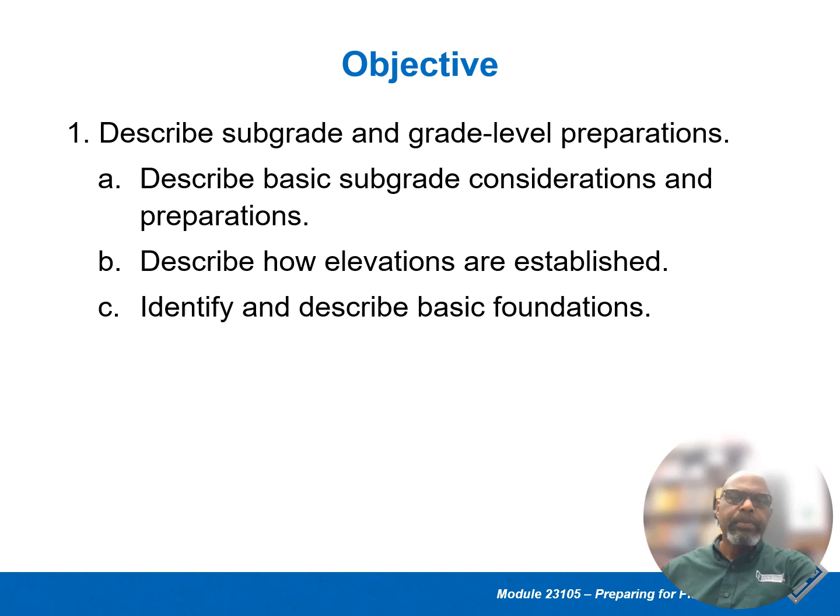First, we're going to be looking at the subgrade and grade level preparation, getting it ready before the concrete is poured. The objective of this section: you should be able to describe subgrade and grade level preparation, describe the basic subgrade considerations and preparations, describe how elevations are established, and identify and describe basic foundations.

There will be a performance test, and we're going to look at different things we can use to operate a vibrating compactor. We don't have one here, but I will have some videos you can take a look at to see how it operates and the purpose of using a vibrating compactor and what the compactor is for. We should also check and confirm the elevation of a prepared subgrade.

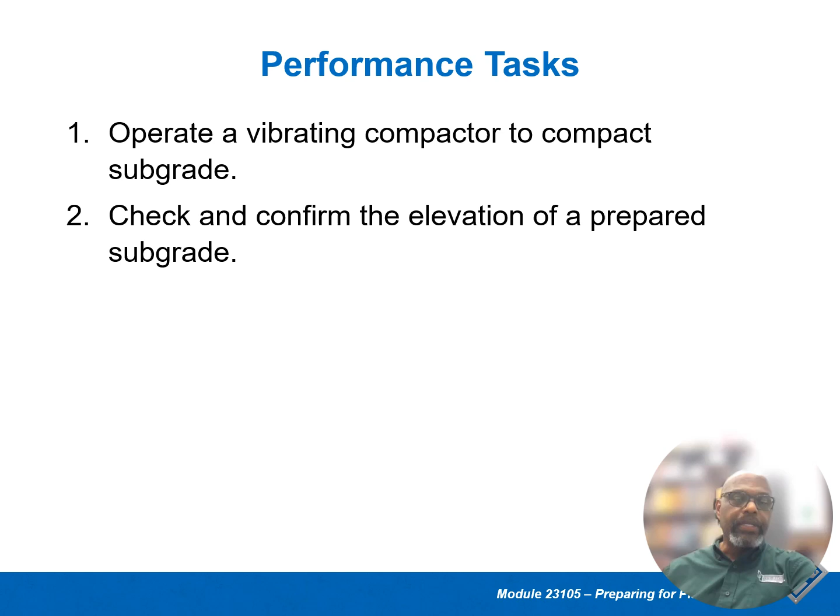Those are things that we can do. Again, when it comes to construction, safety comes first. So we need to know the company's safety policies and procedures. If you're working for a legitimate company, they will have policies and procedures that must be adhered to.

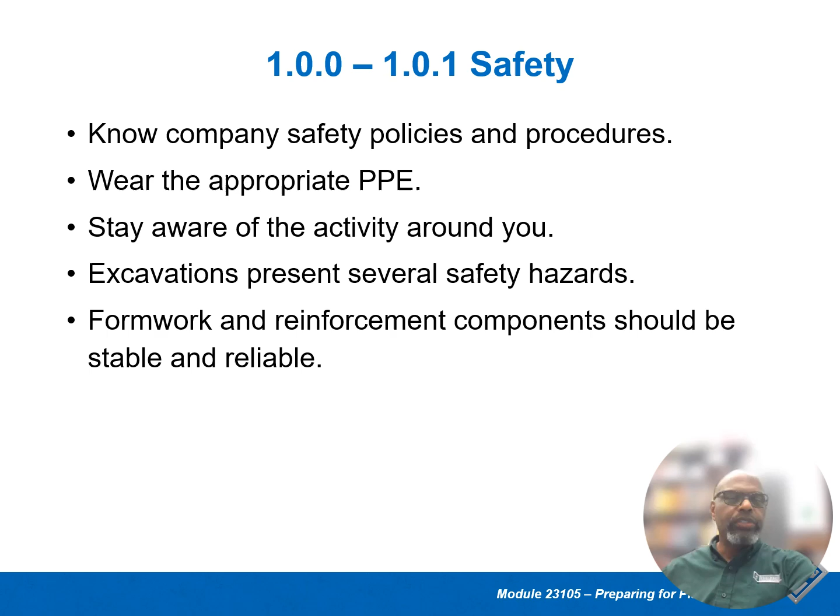We need to wear the proper PPE. We need to stay aware of activity around us. Excavations, which is digging holes in the ground, moving soil, moving the grade from one place to another, clearing it out - excavations presents several safety hazards, and formwork and reinforcement components should be stable and reliable.

Subgrade preparation: a well-prepared subgrade provides uniform support to the structure above it. So the most important thing to keep in mind is that when we're using concrete as a building material, what's below it is just as important as the concrete.

Poorly prepared subgrade can lead to differential settlement. In other words, some places might be higher, you might get cracks, or you may get concrete dropping to a lower position if it's not done correctly.

Let me give you an example real quick. I bought a new house, and each year the apron as you go into the garage dropped probably a half inch, until it was close to 6 to 8 inches. So to go into the garage, you had to slow down and really push the vehicle up that ramp to get in.

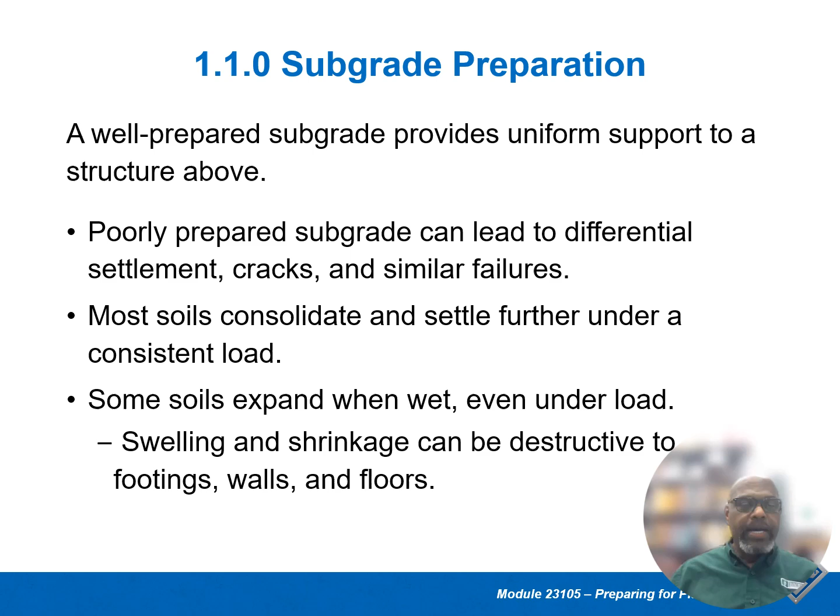Some soils expand when wet, even under loads. Swelling and shrinkage can be destructive to the footing, walls, and floors - and whole buildings. If you look at a brick house and see stair-step cracks in the mortar in the bricks or blocks, it's probably because the foundation has settled and cracked or been damaged, and that is a major problem.

Proper subgrade conditions or considerations: construction sites are surveyed, mapped out, and planned. And the soil must be tested.

It is tested for many different things, from contaminants, for number one, but also what type of soil it is - if it's sand, or clay, or a combination of both, if it's topsoil, whatever it is - it needs to be tested to find out how you're going to prepare it.

When taking soil samples, they would make some type of grid to take certain samples, like every 3 feet or every 5 feet, whatever the distance is, and then take them in different locations to traverse that area, going across different levels to make sure what's in the ground is known. So reference points, benchmarks, and elevations are established by a survey crew.

Excavation or concrete crews may be expected to do the work and lay out the things on that site. And so they need to know what's there so they can prepare it correctly.

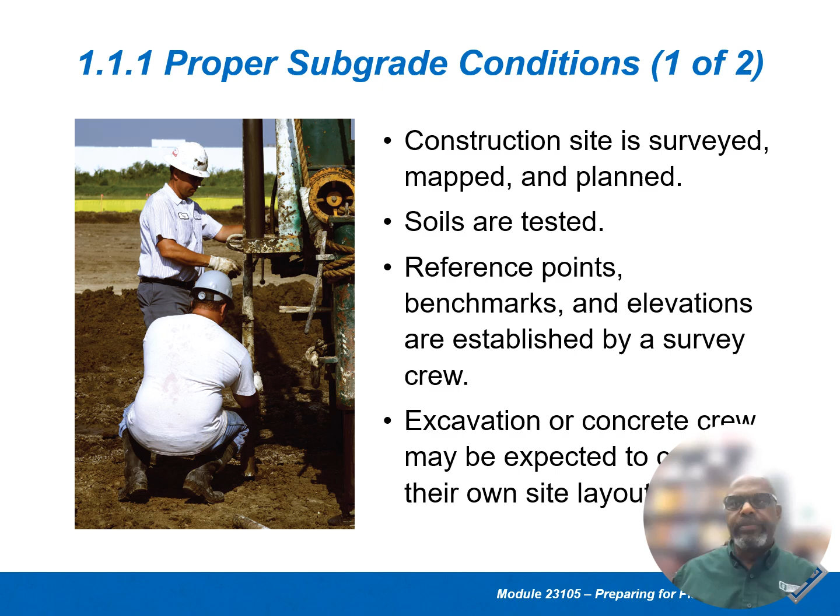And I'm going to tell you, it will shrink, it will cave in. I've seen a spot of land once, and it was always a divot there, a hole, and it was holding water all the time. And no matter what you did, it was always there, always. So it took years of filling it in to be able to build it up and to compact it to get it to be stable.

So soft spots will not support a slab. Hard spots, such as a buried boulder, can move upward and damage a slab too. The ground around it might be soft, but a boulder is hard, and it can cause some shifting and uneven stress on the concrete.

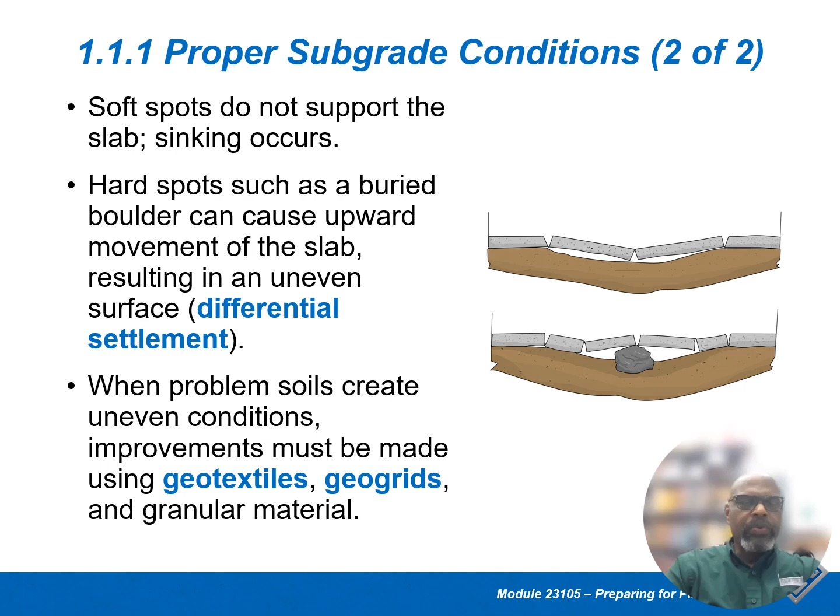So when problem soils create uneven conditions, improvements must be made using geotextiles or geogrids and granular type material as a base.

Compacting is the consolidation of soil by tamping it, rolling it, vibrating, and or the application of weight. In other words, using something to take that soft soil or sand and really compacting it down so it becomes a solid structure to be able to build on top of.

So many times you see large construction sites, especially building warehouses and things. When the excavators come in, a lot of times they're taking some soil out to bring other soil in, because they know what it is, to be able to compact it, and they will spread it out a certain depth, and then they go over and over again just to vibrate and to roll it.

And I'm going to show you some of the equipment. I think the next one would be something you see on very large job sites when they're building warehouses. But the purpose of it is to have a good base. Without a good base, it won't hold up.

It increases the stability of the soil by eliminating voids. It can reveal problems that need to be addressed when you're compacting. You're compacting, and next thing you come back and see it's unlevel again. That's just telling you something. You need more compacting, more of a base added to it to correct those problems.

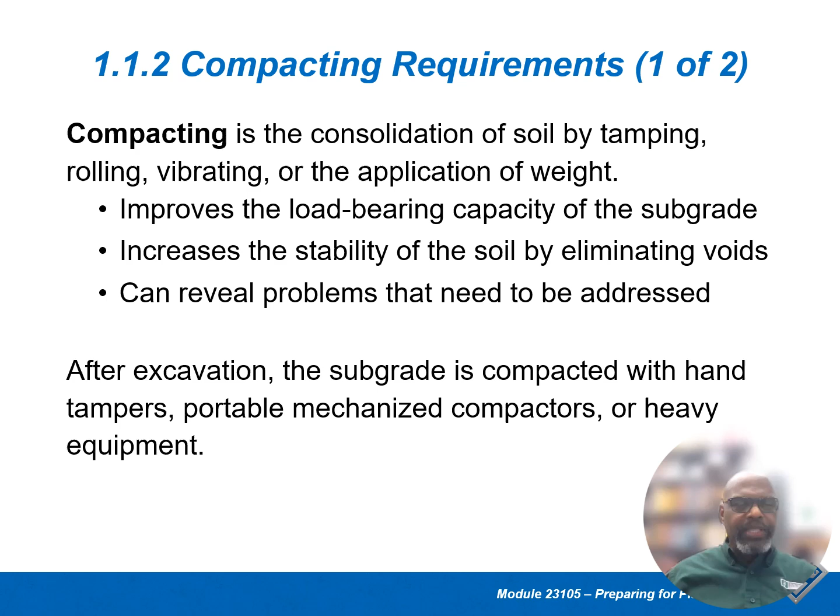The hand tamper is just a flat thing. You got some weight to it with a stick on it. You just do it by hand by tamping it down. But they have a mechanized compactor that sits back and it pats back and forth to pat down the soil. But again, not just using soil, a lot of times they would put down a base, using some type of granule like crushed rocks that are crushed pretty fine, to be able to compact that and give it a solid base.

Here's a granule material that is used. It's like crushed rocks, and it could be sand too. This machinery, basically what you see there, will vibrate and roll those little granules, putting an indentation into the ground, but it's compacting it as it rolls over. It's putting that weight in those defined areas.

So sand and gravel are not cohesive and need vibrating compaction equipment to be able to compact them. And to help it compact, because sand shifts really easy, if you add water to it, it becomes more able to compact, so that you can join it together.

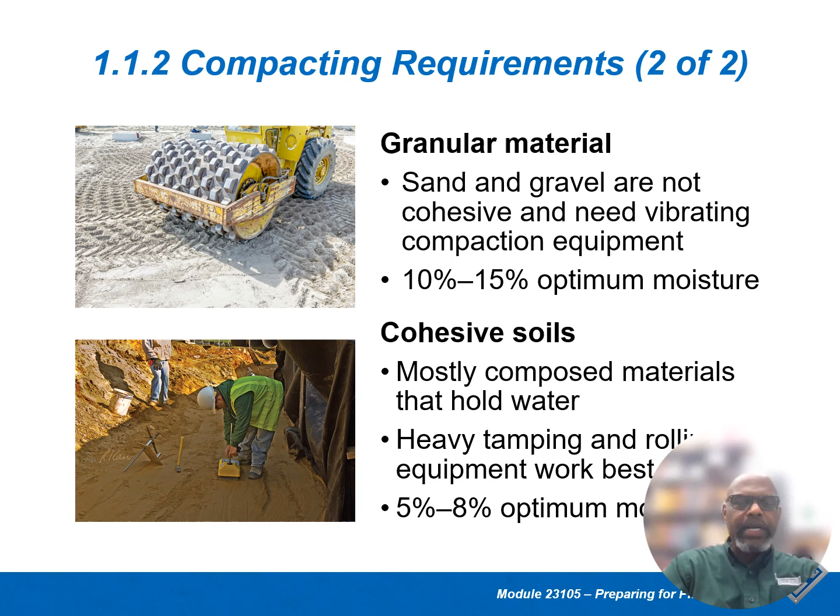Cohesive soils are mostly composed of materials that hold water, such as clay. Clay is a material that sticks together really tight. Heavy tamping and rolling equipment works best, and the optimum water content would be between 5 and 8%.

Groundwater, if you've got a high water table, can affect how things cure and shift. Many times, groundwater close to the surface can hinder subgrade and foundation preparation. So drainage tiles may be specified and installed outside of the foundation wall, adjacent to the base, to drain the water away and keep it from having issues.

If you look at this diagram, you can see the tiles have crushed stone around them for drainage, but also to keep the drain tile from getting clogged up. So you're using something that can filter out things that would plug up the pores, while still allowing the water to be filtered through.

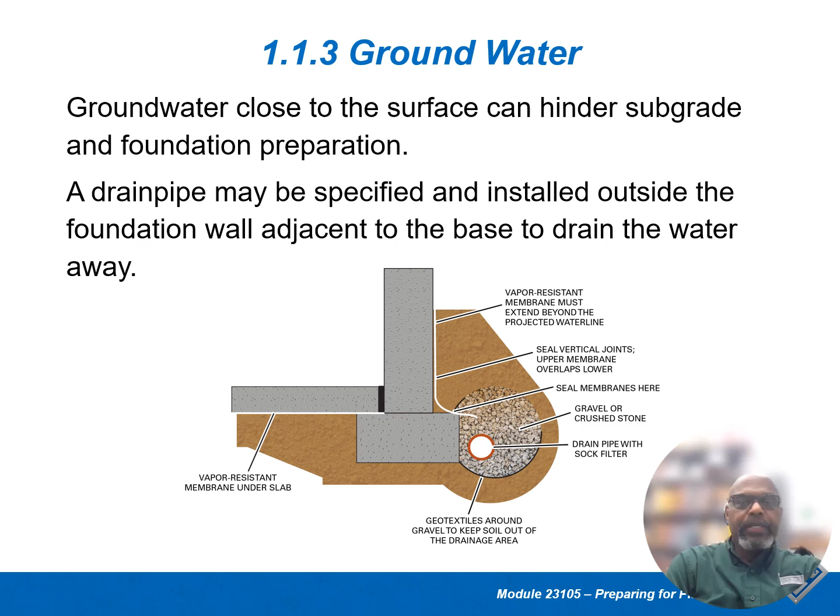Using vapor barriers, which is basically some type of plastic membrane, keeps moisture from coming into the floor or the concrete. That's a really good diagram of how to use drain tiles to remove water from the structure. Drain pipes may also be specified for the job, but the main thing is to keep water away from the foundation.

Flowable fill, or controlled low strength material, refers to the flowability of the fill. It's used in utility cuts, trenches, and similar applications as a backfill or a subbase. A mixture of fly ash, water, and cement can be used, and it does not require compaction. It has very low compressive strength.

But it's self-leveling because it's so wet - water poured in always seeks the same level - and this is used to give it strength.

Basically, we could call it a slurry mix. It's used in utility cuts - in other words, many times when burying things underground like utility lines, they just pour this slurry mix into the trenches to keep from damaging the pipes when things shift.

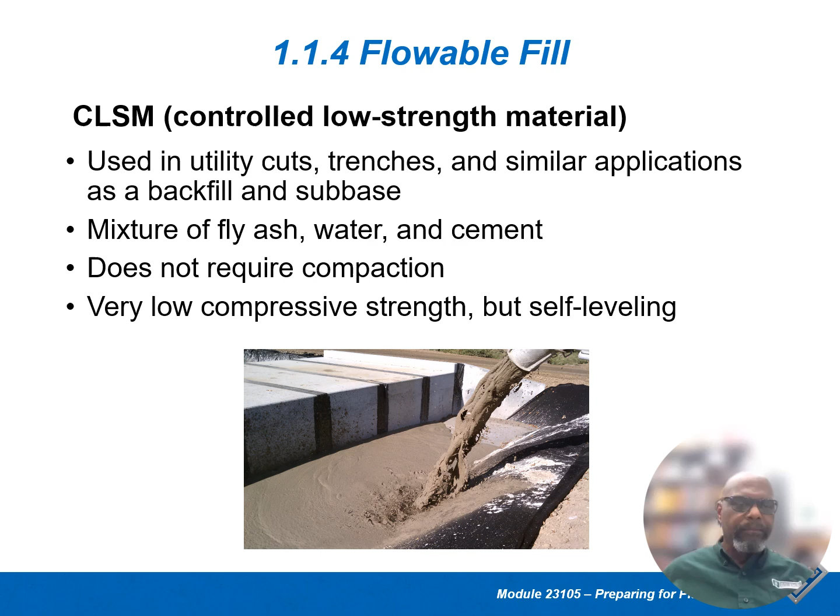Establishing elevation: there are several ways to establish dimensions and elevation. Elevation is the height of something. You could use a builder's auto level, a laser level, a hand level, or a string with a string level on it.

These are different types. A builder's auto level is where you look through to sight things out. A laser level just shoots a laser that you can use with a measure to get the height you're looking for. I'm going to see if I can put a video that you can watch to see how to set levels.

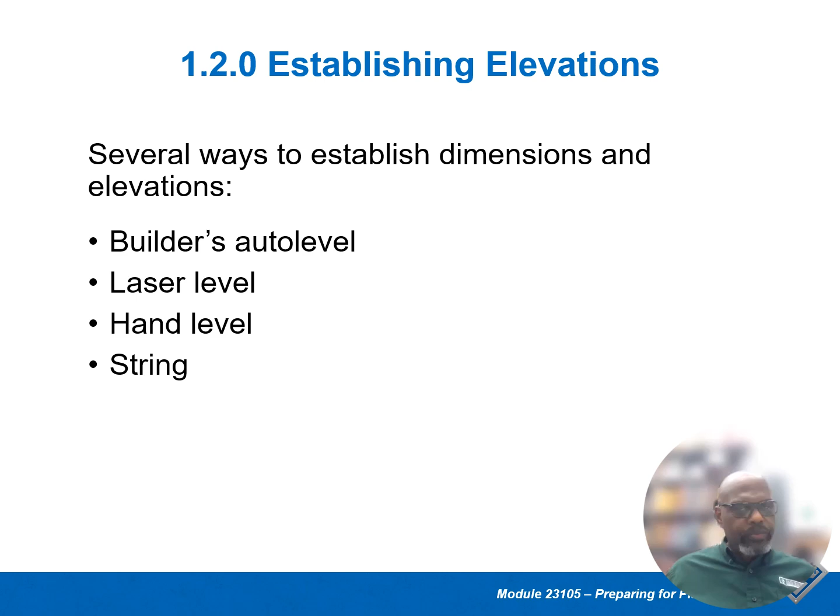This is a builder's auto level, used for sighting things so we can take measurements and determine elevation. What you have is a measuring stick, and where that level hits is where you know how low something is. You can take multiple readings.

I used to set these up and use them when pouring concrete or putting in base material, to make sure everything is level. If you're using some type of fill to level it out, you want to make sure that when you pour concrete over it, it is level.

A builder's auto level sights through the scope to the benchmark. A benchmark is a measurement that you're starting with, what you know - a measurement you want everything to match. So find your benchmark and determine its elevation.

You rotate the scope and sight on the leveling rod, holding it vertically at the unknown point. The difference between the two readings establishes the elevation of the second point, wherever you're looking at.

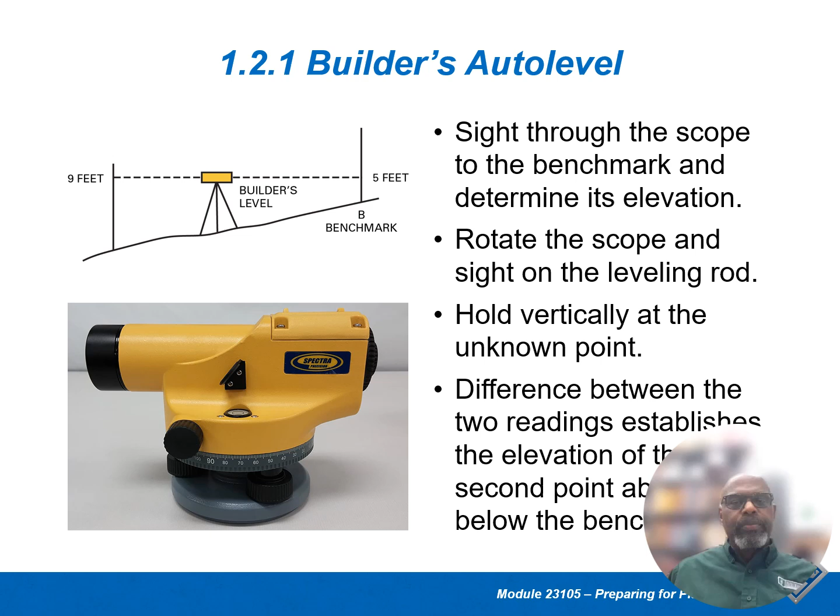I'm going to show a video so you can understand how to set this up and how to use it, and we will show you one in the classroom, how to use this builder's auto level.

A laser level - you can see this shoots a laser. It sets the base of the leveling rod on the benchmark. Turn the receiver unit until it faces the transmitter - there are two different components you're using.

You're shooting a transmitter, which sends a signal out. The receiver hits that signal, and you can know where the level was at by using it to find the mark. The laser shoots out a beam, and you use a receiver to receive it to know what your measurements are.

Slide the receiver up and down until it intercepts the laser beam. The receiver box will give a steady tone and show a bar when it hits the target.

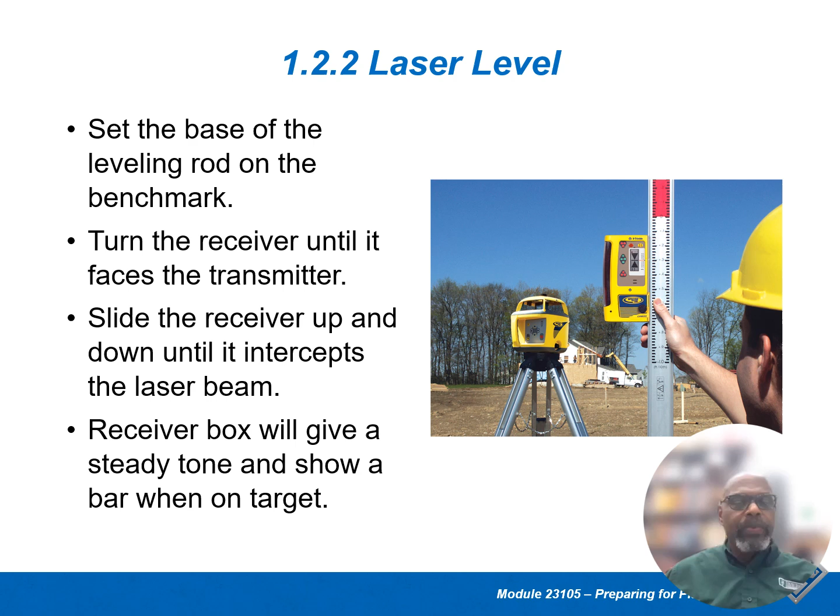Batter boards in construction, especially in surveying, when you're laying out the building and especially the corners, and you want to know exactly where you set things at, you will build out a batter board, or you have some already made, but you would set these batter boards to find the corner, the starting point.

Batter boards are wooden stakes and horizontal boards erected 3 to 4 feet outside the edge of the slab, outside of the slab, and we are setting some strings to be able to do it. We'll see this in another slide, but understanding what it's used for.

We use a nylon string, stretched tightly, taut, between the batter boards. The forms are placed using the string lines as a guide.

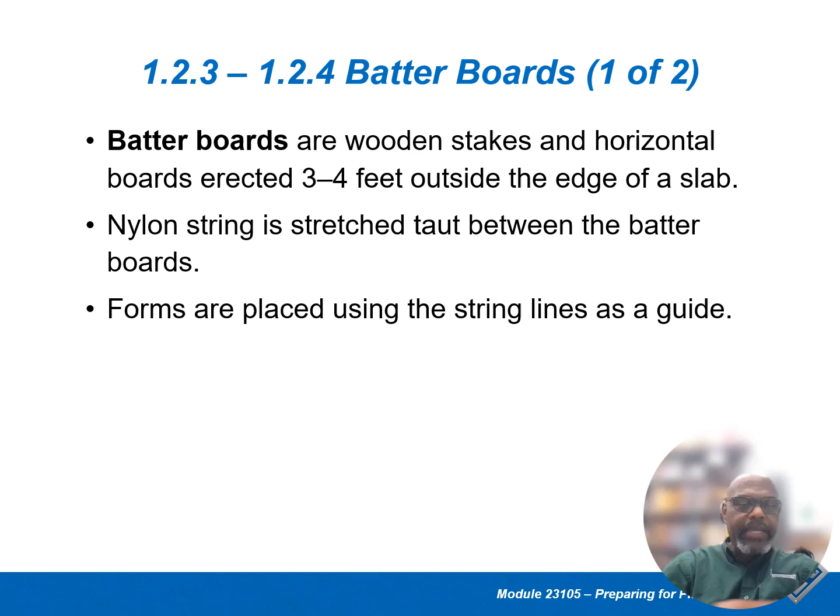You can see these batter boards at every corner. From that batter board, it's stretched out 4 feet from it, so we have room to get around, because we set in a string to find out exactly the layout. If we need to trench out a garage for the floors, or set our foundation or walls, we use these batter boards to run a string, set it very tight, and find exactly the layout of the structure.

So when the slab dimensions are wider than the screed, the intermediate elevation points must be established inside the slab. Use a level to transfer the elevations - in other words, use a string level that you can move up and down till you get exactly level, so everything is at the right point.

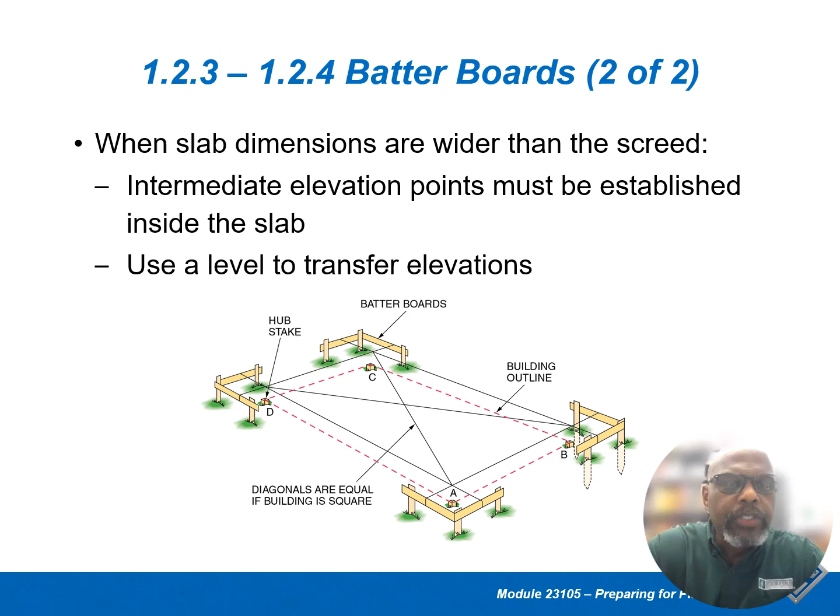One of the most important things about using batter boards and lining things up is to make sure it is square, that the corners are square. A way they can check it is by checking the diagonals from corner to corner, diagonally from one end to the other. If it's square, they will equal the same distance.

Foundations: the chosen foundation depends on the structure and the load imposed on the soil. A deep foundation includes piles and caissons, used for heavy loads such as tall buildings with basements and structures on poor soils. Shallow bearing foundations, such as those under walls and columns, are used for large structures constructed on good, supportive, stable soils. Foundation depth is less than or equal to its width.

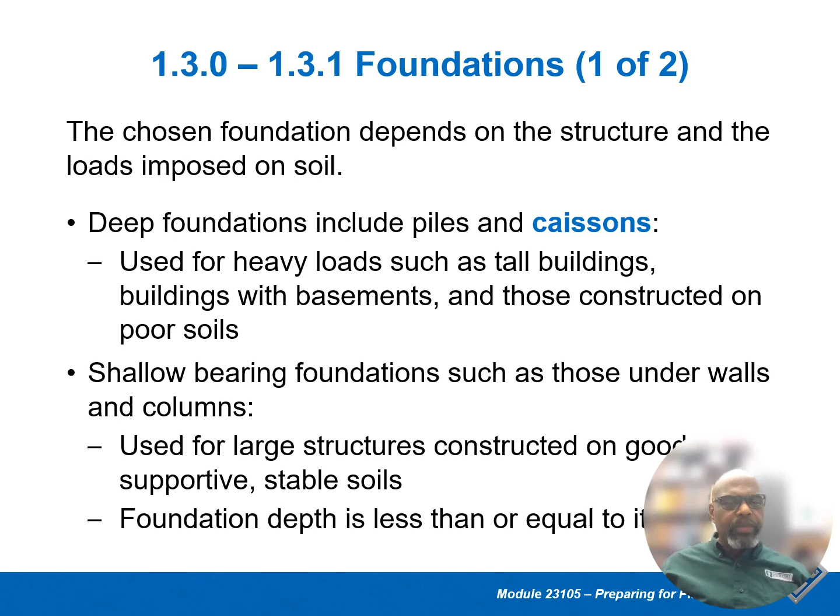In other words, the foundation is always large, to support and span the weight of the walls in the building over a large area, dissipating some of that weight over a larger space. So per square foot, the weight will be a lot less.

These are certain types of foundations. A foundation will always have a footing - if you look at these, they pour this first. This is a pad that is poured, and it's always wider than the walls it's supporting, because it's dissipating the weight over a larger area. Again, looking at just a cutaway, the footing would certainly be designed to go over a larger space.

I'm going to try to draw something to show you what the footing looks like - this is the footing going across the building, and this is the corner, and of course it goes up vertically. And so again, if this is the wall, this footing would be poured first, and then they would pour the wall on top of it once it cures.

These pieces here are rebar, reinforcing and giving more tensile strength to that concrete supporting those walls. We know concrete has good compression strength but very poor tensile strength. With the weight of the walls of the building on top, they add rebar to it - maybe even the walls will have rebar too, because the pressure against the grade may be there. Let me erase this and go to the next slide.

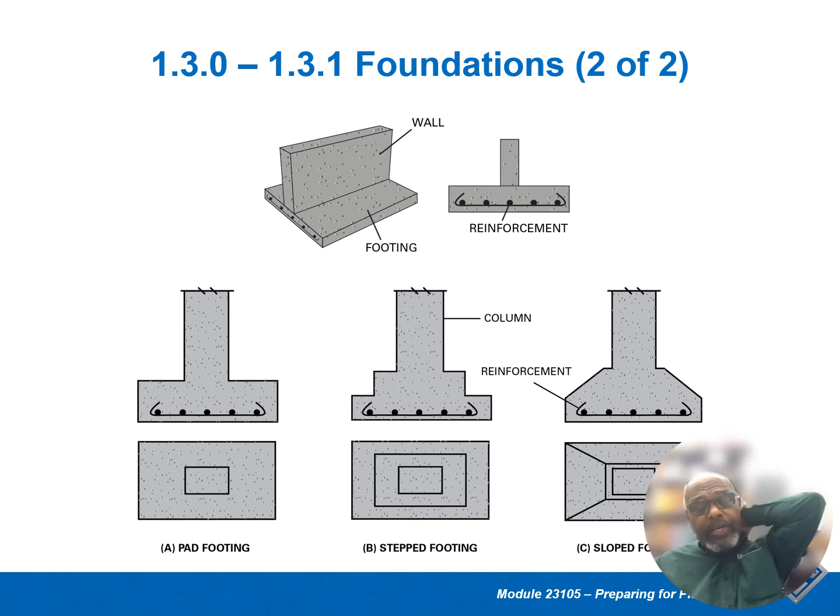These are different types of footings in these diagrams. So you can see that the footing's there for a reason. It is the main support. It's supporting everything.

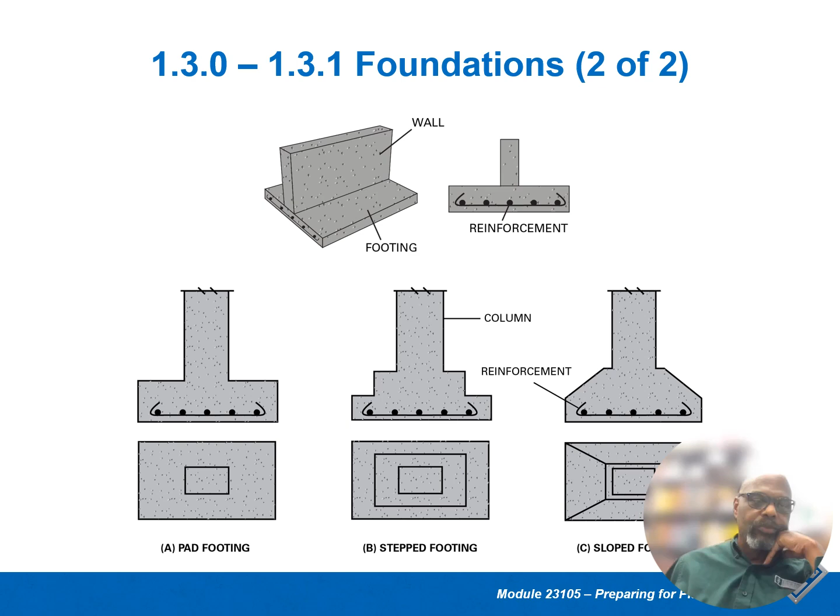So constructing foundations: most concrete foundations do not require finishing. They just pour it and that's it. You don't need to float it out, you don't need to screed it, you don't need to do all these things. It's just put there. And many do not require a form, depending on the type of foundation.

Sometimes they could trench it out and just pour it right into the trench, and that becomes the foundation. So because it's buried in the ground, the appearance is unimportant.

4 primary considerations: soil load bearing capacity should be tested. Reinforcement must be placed per the specifications. Concrete must meet the specific and specified strength, and footings should be sized and positioned according to the plan.

to provide intended support. Again, never make any changes. If you're building something, whether it's a house or a building, whatever the architect says to build it, that way.

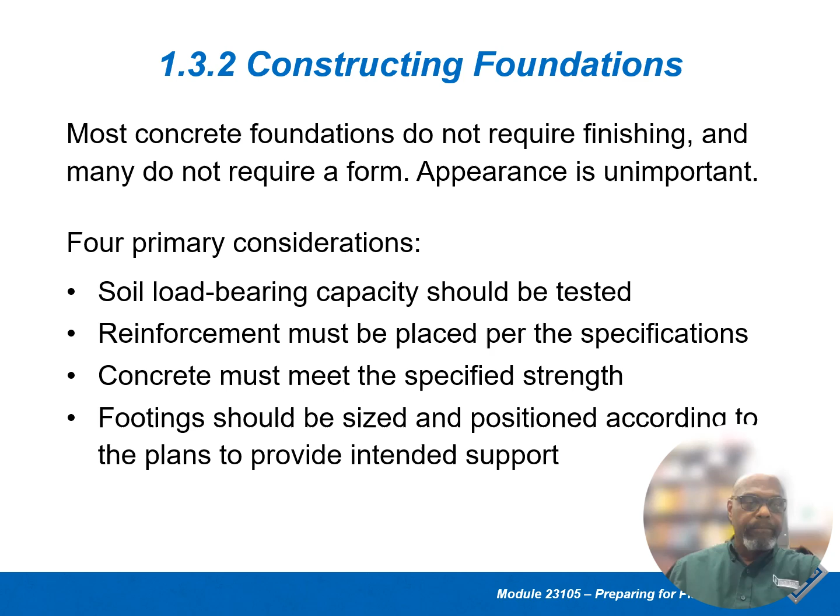So here's some terms we're going to go through for this first section. Angle of repose: that is the sharpest angle relative to the horizontal plane at which the sloping surface of the soil, such as the walls of a trench, it remains stable. The maximum amount of slope that a given soil can maintain before it begins to slide or to cave in.

Now that is really important because if you're trenching out certain things, you don't want it to cave in, and that can be very dangerous. And so they would have to shore up those walls so it doesn't cave in.

Batter boards is a temporary framing member that helps define structure corners and are set at a precise elevation upon which nearby elevations are based.

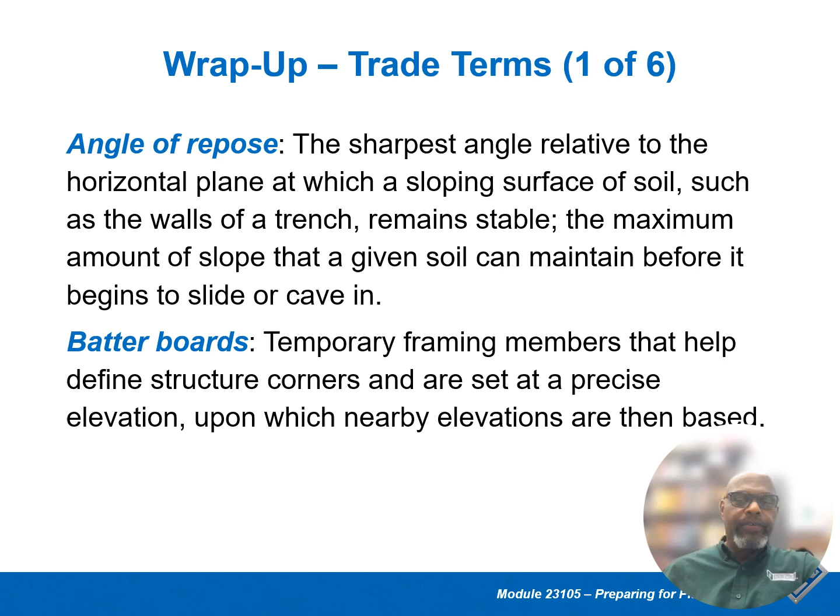So in other words, if you pour in, let's say, a garage floor, you want that garage floor level. You don't want one side higher than the other side. So we would set this using batter boards to set the level of that grade and also of the floor.

Benching is a method of preventing trench cave-ins by excavating the sides of an excavation to form one or more horizontal levels like steps, usually with vertical or near vertical surfaces between each level.

So again, benching is digging out the area so it's not like a vertical wall that can fall in. Benching is almost like an upside down pyramid. In other words, the farther out you go, the wider it becomes.

Benchmarks is specific points of reference, typically considered permanent, that marks an elevation. So a benchmark sets the main level, or it sets what we use for determining what everything else is going to be built to.

Caissons is watertight structures or chambers used for constructing work below water or as a foundation element. So caissons, in other words, trying to use these as a chamber that can be used. Matter of fact, I'll give you an example.

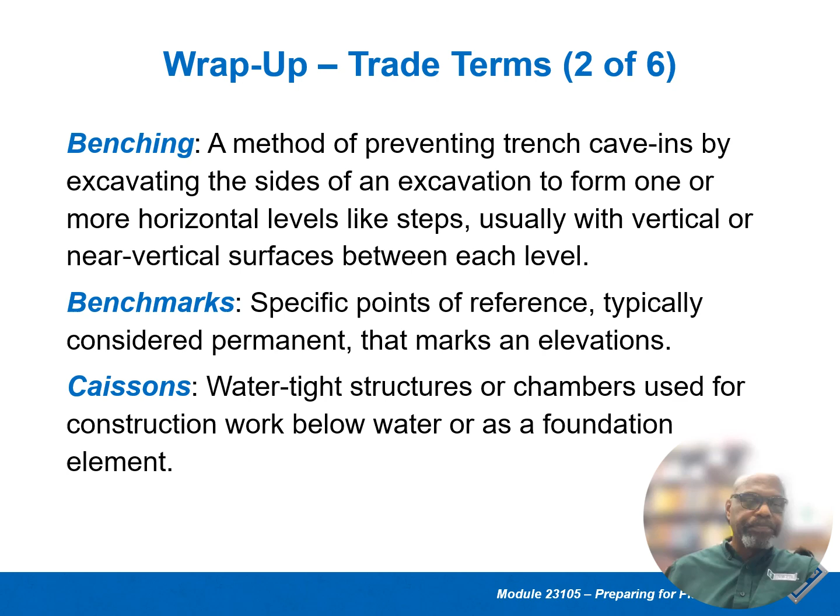Differential settlement is the uneven settlement of a foundation or slab, causing the surface to become uneven in response. Differential settlement in a slab can cause sections to settle at different elevations, which is not the way it should be.

Flowable fill: it is the material similar to concrete that is more liquid and used as a self-leveling fill, generally containing fly ash and cement as primary ingredients. The more formal term is controlled low strength material. Or sometimes you may hear it called other things too, a slurry mix. That's basically another thing you may hear. It just pours really easily.

Footing is a foundation placed on the grade, which is the ground, that transfers all the load weight of a building or another structure. This is the main thing. So when you make sure that the ground is solid and compacted, we put our footings down. The footing is important because it's supporting everything else.

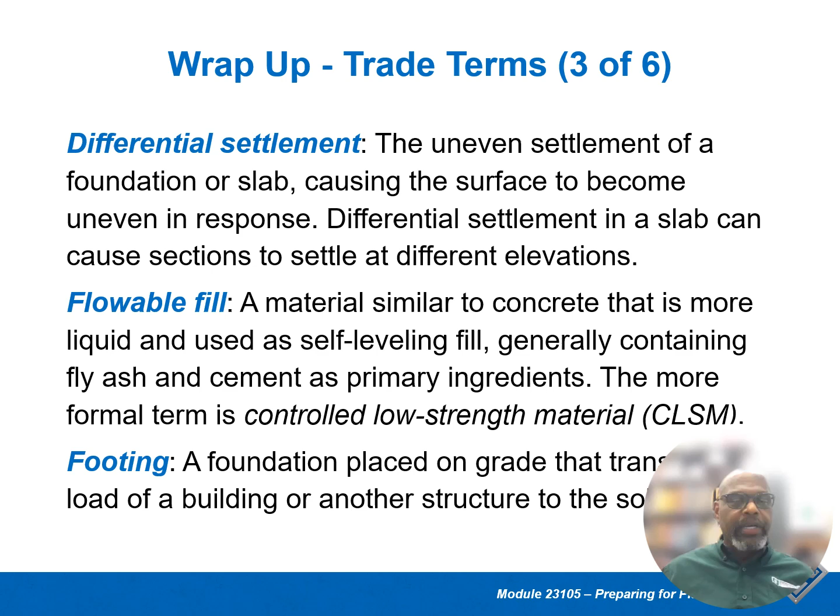Geogrids are synthetic materials that resist decomposition and are used to stabilize soils, unlike geotextiles that are a porous fabric. Geogrids are more like a synthetic fencing material with similar size openings. Believe it or not, it works really well. You can put these geogrids down and fill it up with really small crushed masonry, like rocks and things, and it becomes a hard surface. It doesn't seem like that way, but it holds things together.

Geotextiles is a permeable woven, non-woven, or knitted fabric used to improve soil stability and control erosion.

Primary control point is a specific point that establishes both a location and an elevation.

Shielding, in the context of excavation, is the materials to prevent the trench from collapsing. There's different ways to do it, but it's protection of a person that may be in a trench because it can cave in.

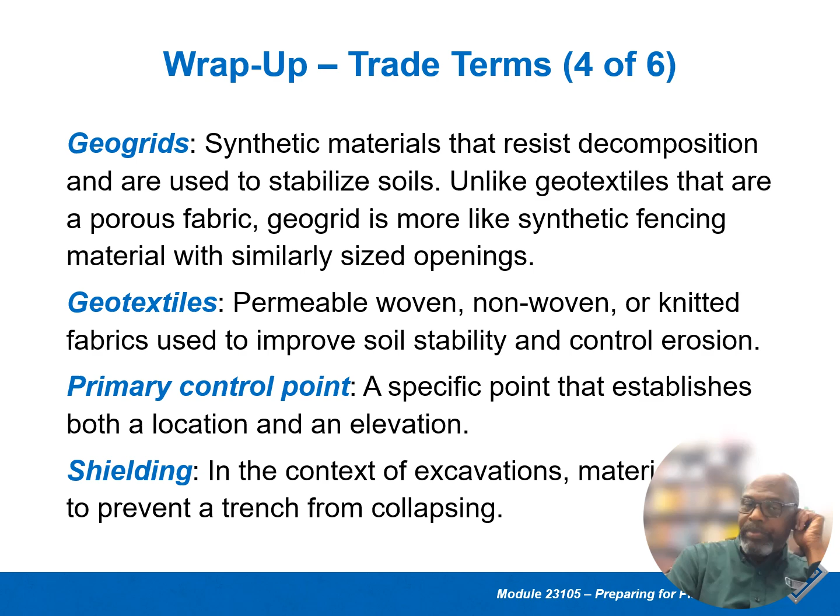Shoring is what I was talking about before — shielding is one way you can do it is shoring. It's in the context of excavation. It refers to the material placed in an excavation that can be adjusted and held firmly in place against the walls with hydraulics or pneumatic actuators, or using manual screw jacks, to prevent the walls from collapsing inward.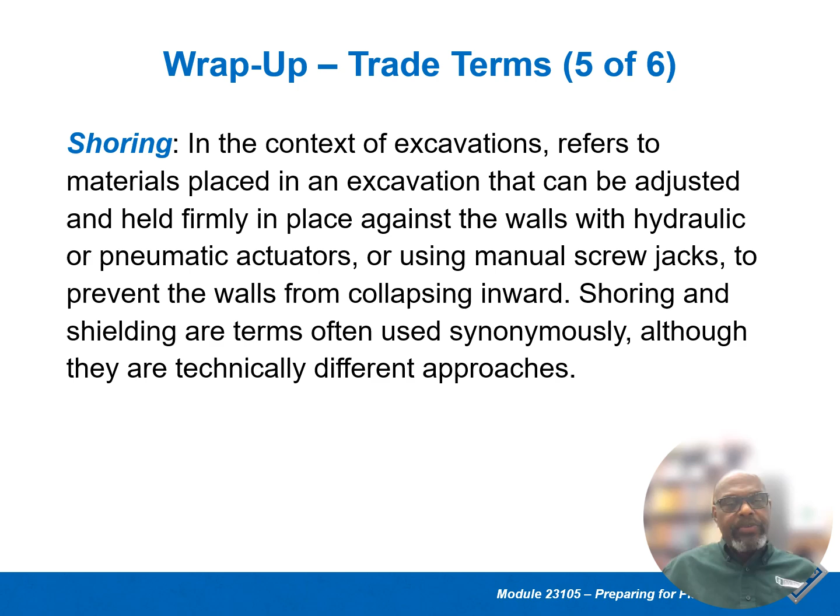Shoring and shielding are terms often used synonymously, although they are technically different approaches. Shielding and shoring are similar, but when you're shoring up the walls you're using physical walls to be able to hold back anything while you're working in that trench.

Surcharge loads are loads applied to the surface of soil close enough to an excavation to create pressure that works against the excavation walls and can lead to their collapse. Examples are spoil piles or heavy equipment adjacent to an excavation. In other words, these surcharge loads are something that shouldn't be there. Somebody parked — you got an excavation and you left, let's say, a backhoe sitting there. All that weight can cause the ground to give way and cause a collapse of the walls.

A trench box — again, it's like shoring, but it's a physical assembly of walls that you can just drop into a trench and be able to work. Trench boxes are steel or aluminum brace assemblies placed into a trench or excavation to protect workers from wall collapse. However, note that trench boxes are not designed to press firmly against the excavation. In other words, the walls are still pushed back. If it collapses, it's going to collapse on the walls but protect the persons inside the box. So when it's trenched out, it is trenched larger than that trench box.

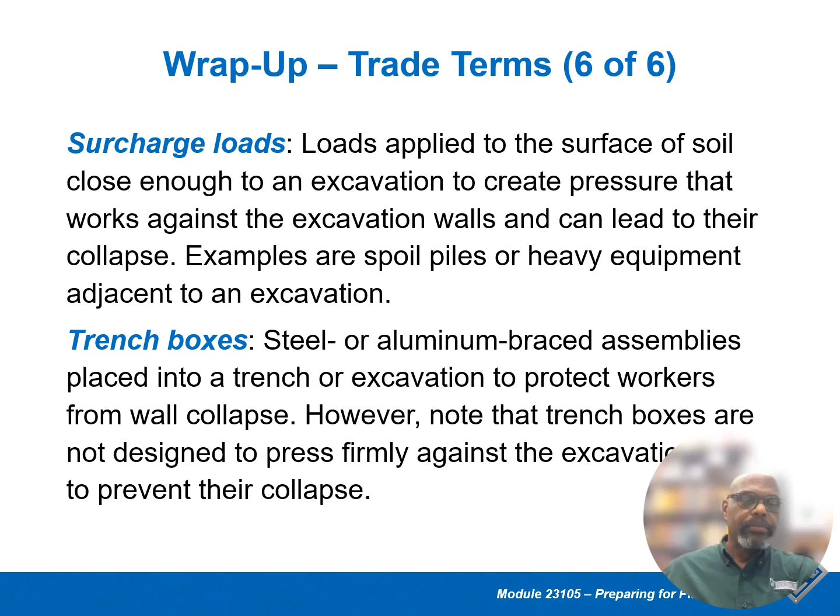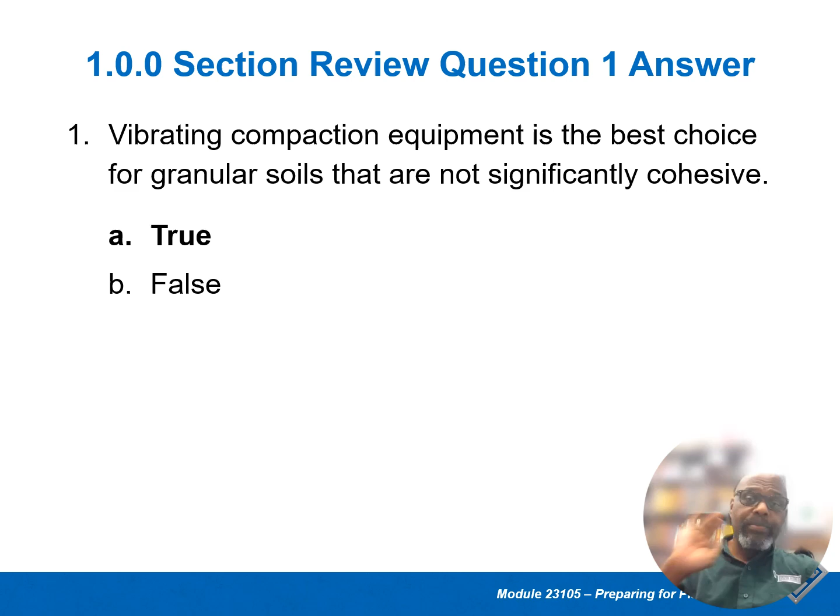Got some questions. Alright, vibrating compaction equipment is the best choice for granular soils that are not significantly cohesive — is that true or false? The answer is true. They're using granular soils, adding materials to the soil, or compacting it. The vibrating actually helps with compacting the soil, bringing it together. That's one of the reasons why we add the granular soils or aggregates to the soils, to help it become stronger. But then again, the water amount will be less.

Batter boards are typically erected blank. Is it A, below the slab form, B, above the slab form, C, 3 to 4 feet outside the edge of a form, or D, at the benchmark location? It is 3 to 4 feet outside the edge of a form. That's to give you room to move that string around, and also give you room to work until you build your forms.

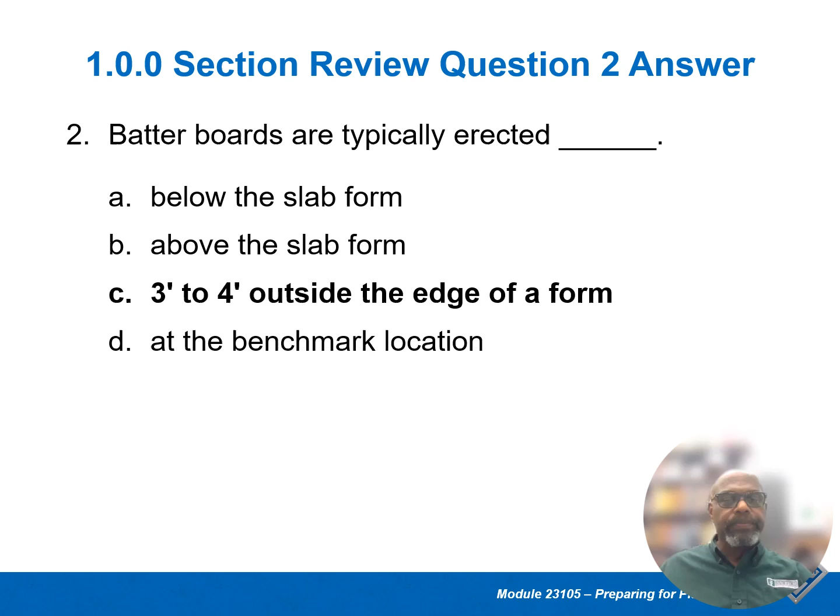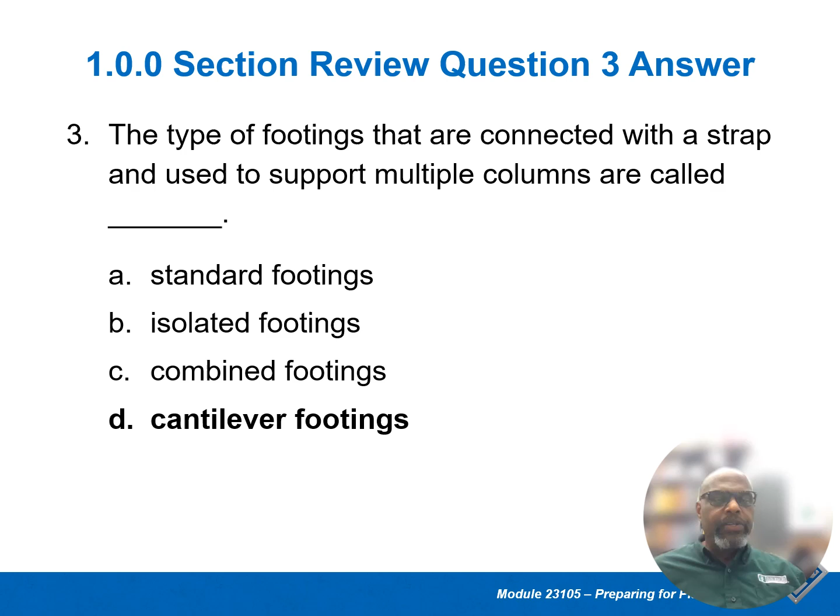The type of footing that is connected with a strap and used to support multiple columns is called blank. Is it A, standard footings, B, isolated footings, C, combined footings, or D, cantilever footings? It is cantilever footings. Cantilever means extending over, extending over.